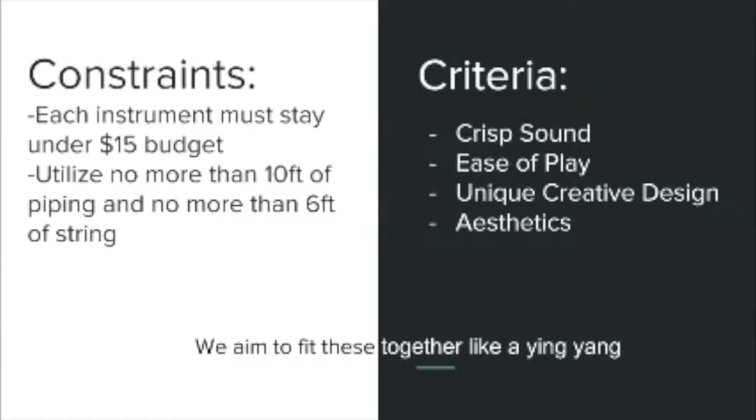The guys and I aim to fit these together like a yin-yang. Our first design is the Mini Broom Recorder.

This will be about 62 centimeters long, about 18 centimeters wide at its widest point, and about 3 centimeters thick. It closely resembles a recorder, which is tested and easy to use. Recorders have a good mid to high range capability, and the design is also similar to a flute, which has a record of being a good high note instrument. Recorders have been used for years, so the technology is proven, and our sound quality should theoretically meet that criteria.

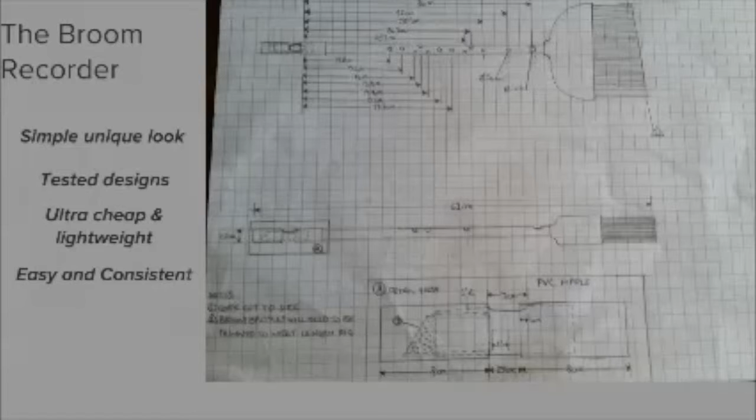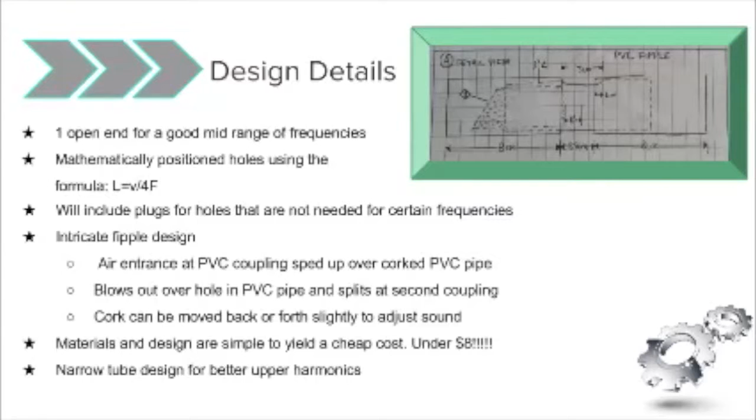Now let's get into some design aspects. First, we have one open end, meaning it can naturally hit lower frequencies than a 2 open-ended instrument, as a longer wavelength can fit in a 1 closed-end instrument. We also used the equation length equals speed of air divided by 4 times the frequency for our hole position. We have a narrow tube to favor the upper register, and we've used a PVC fipple design, which speeds up the air over the hole of the PVC pipe and causes the vibrations needed to create sound. All this under the cost of $8.

In reaching our decision, we started with a garden hose design and a plunger flute for mid to high notes. The biggest problem with the garden hose was replicating the French horn mouthpiece and the placement of the tone holes. The plunger flute idea gave us a bell end where the plunger was, which wasn't good for flute acoustics, and I was worried about the consistency of the typical flute embouchure mouthpiece. But the plunger got me thinking: a small cylindrical object but with an easier mouthpiece. Voila, the broom recorder idea was born, yielding a higher total among the set criteria.

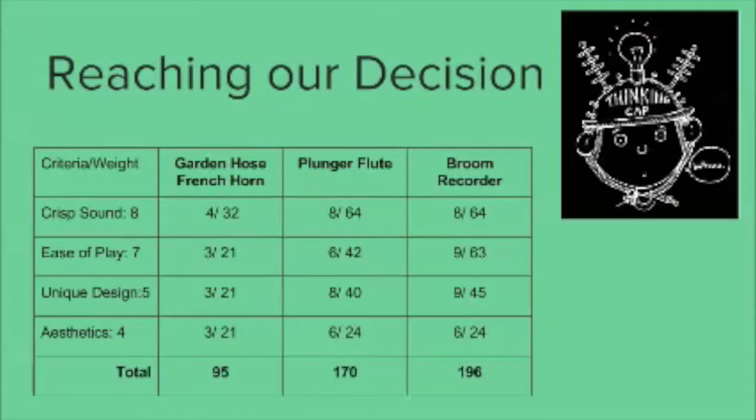I'm fully confident that this design, as well as the other designs, are going to be a huge success. Now I'm going to pass it over to my teammate David, who's going to give you a little insight on his design.

Thanks for that great introduction, Daniel. My name is David Gwynn, and I'm going to be working on the percussion side of our project. As a team, we brainstormed 3 different ideas for each one of our instrument designs.

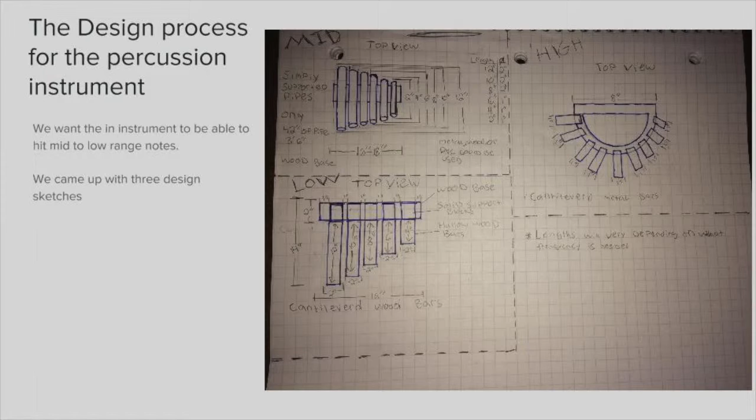The 3 designs I came up with would be a simply supported one with pipes, a cantilevered one with wood bars, and another cantilevered one with metal bars.

The final design we decided to go with would be the pipes. The reason we chose the pipes is because we could get the best sound out of it, and one of the other reasons I really like the pipes is I'm able to change the material, length, and diameter fairly easily.

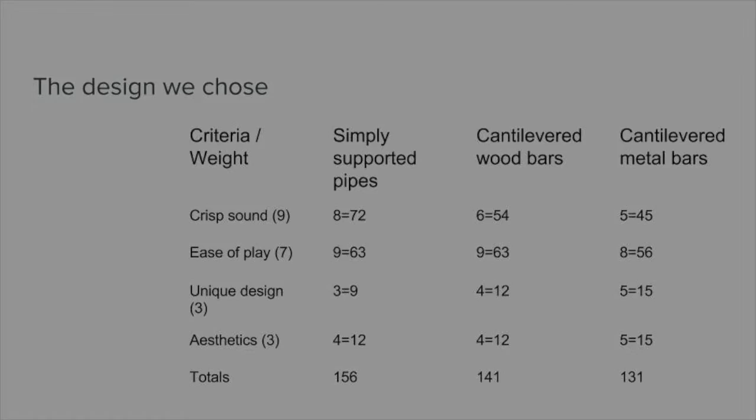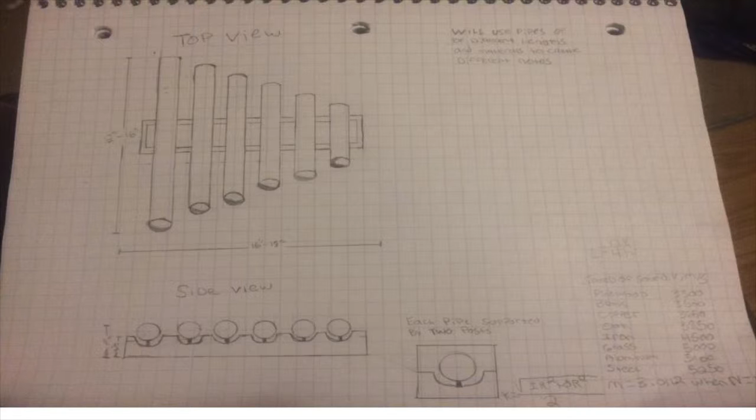The way we're going to have this instrument set up is simply supported, and each one of the pipes will be resting on 2 posts. Those posts keep the amount of surface area from the instrument down, so when we hit that percussion instrument, that frequency is resonating through the pipe and not through the wood, and it's not getting lost. We are also going to use a couple different materials, looking at different types of metals, a few different types of wood, and bamboo as well. Looking forward to doing this.

And next up we have Ryan. Here you go, Ryan. Oh, heads up! Huh? What was that? Ouch! David! That hurt! Hi there.

The decision to use phosphor bronze strings was driven by their cost and mass. They're pretty cheap, $5 for a set of 6 strings, all different sizes, and heavy enough to withstand the tension needed to create a versatile range of notes.

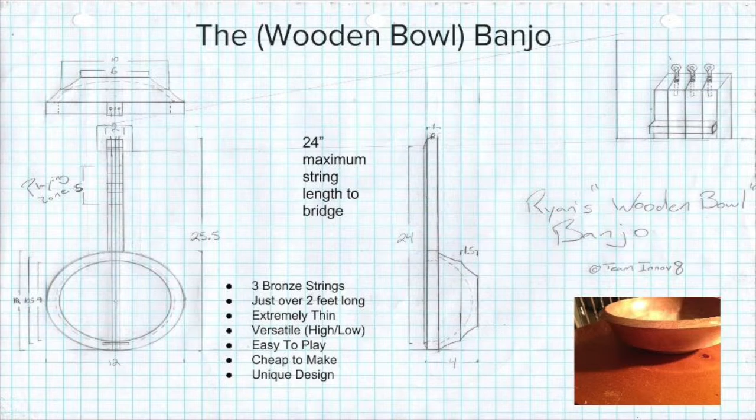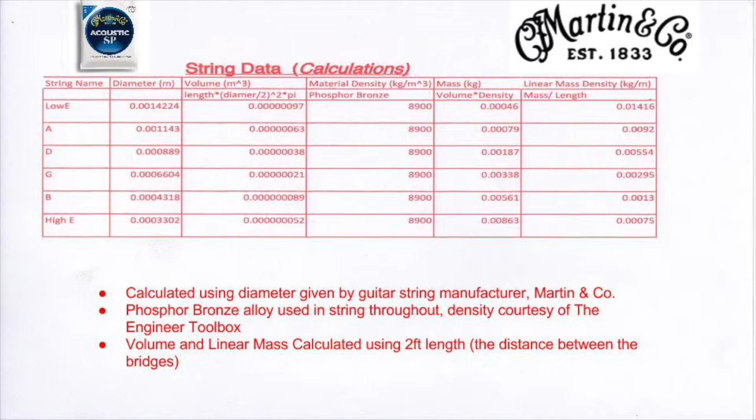Using a string diameter provided by the packaging of the strings, the following was quickly calculated: first, the volume of each string used; second, the mass of each string; and third, the linear mass density of each string. Using the linear mass density of my strings, MATLAB was used to calculate the length of string needed to reach each note. The low notes of ASU's alma mater are displayed against the different strings that were available.

Both the low E and the A were capable of reaching all the notes themselves. However, this would have caused difficulty playing, because the notes would have traveled all the way down the neck of the banjo.

Since a main criteria is ease of play, a length variance was set at a maximum of 6 inches between notes. Using these parameters, and assuming a length minimum of 12 inches, the A, D, and G strings are capable of producing all 9 frequencies at lengths ranging from 14 to 20 inches, or 0.37 to 0.50 meters. As you can see, where other designs fell short, the banjo exceeded. It is surely the best design for this job.

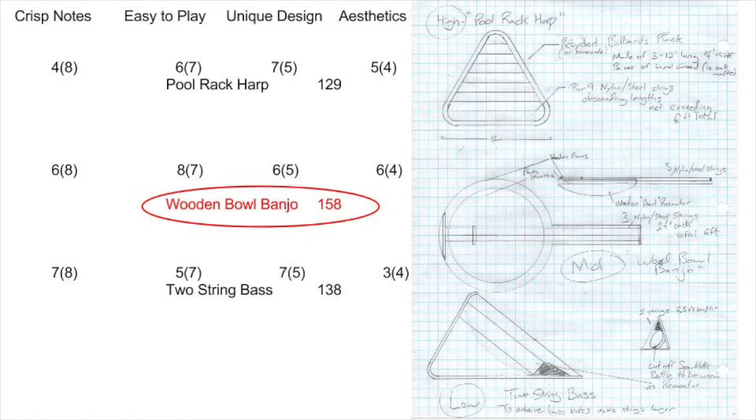Team Innov8 is confident that you will be completely satisfied with your decision to use our Band in a Box.